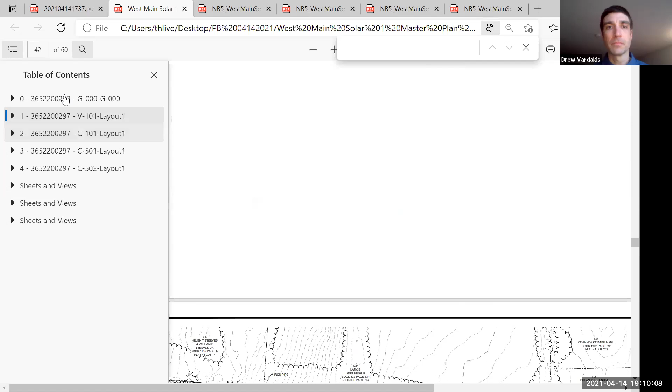Drew, can you introduce yourself? Yes, can everyone hear me? Yes. Yeah. Thank you, Helen.

Members of the board, thanks for having us back this evening. My name is Andrew Vardakis. I'm a civil engineer. I work for Wood Environment and Infrastructure Solutions. We're located at 275 Promenade Street in Providence and 271 Mill Road, Massachusetts. I'm registered in the state of Rhode Island, as well as our company Wood, registered in the state of Rhode Island. I'm the engineer of record on the project.

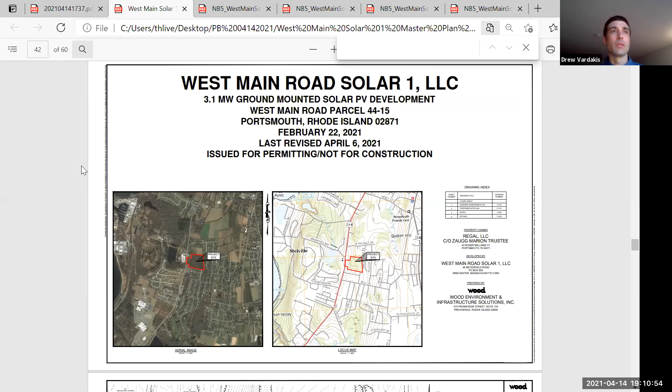So as Helen stated, we were here back in January to present the project. And I can see you have the site plan up, so I won't bother to share my screen. Essentially, the project involves the 18-acre lot and the project area of about 12 acres of that. Within that 12 acres, the fence line occupies about 8 acres. So on the first sheet, you can see the existing conditions plan.

Wood's role as part of this project is the consultant to the applicant. We're the engineers, we do the wetland surveying, we develop the permit applications and the site plan drawings. The first page is the existing conditions plan. It shows the lot, the topography, the property lines, the abutters, things of that nature. If we go to the second sheet, it shows the proposed site plan, which shows the solar array and everything associated with it.

So if you're looking on the west side, the left side of the screen is the west, that's West Main Road. You can see that dark gray hatch area coming in. That's the access road, a 20-foot wide access road. We placed that adjacent to the property line to situate it between two existing utility poles and a catch basin.

That's the construction entrance, which has some larger stone rock for construction vehicles to reduce the amount of sediment being tracked out onto the paved road. And as you can see, there's a bend in that road, so we can sweep the road away from the property line and get into the project area - one, to get away from the property line, but two, to minimize views as you look into the project site.

So if you follow that road in, there's a turnaround, a hammerhead turnaround there for construction vehicles and maintenance vehicles, which leads up to the fence line. It's a little hard to see, but that road essentially terminates at the fence line where there's a proposed 12-foot wide gate. That fence line essentially encompasses the array.

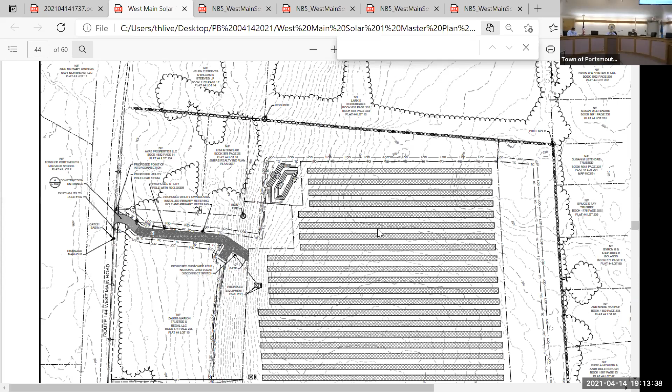So with that tree clearing line, and there's an LOD line, limit of disturbance, that's the ultimate limit of work and limit of disturbance area. We abide by property line setbacks, a minimum of 50 feet, which you can see in the upper right-hand corner is the closest we get to the property line. That 50-foot setback follows around the east side of the property as well as the south. But within that setback, we're not touching any of the vegetation - it remains. We can get into more vegetation and screening details as we move forward with Kevin, our landscape architect. Essentially, the property line setbacks are maintained at a minimum of 50 feet.

From a stormwater, grading and drainage perspective, since we last were here in January we developed some preliminary stormwater plans. Up in the northwest corner you can see grading contours and a stormwater basin. Also on the south side there are three separate basins - the darker lines are proposed grading contours along the south side. Those account for the tree clearing and the change in vegetation and ground cover. What we're looking at now is stormwater calculations to look at the change in runoff due to the tree clearing, which is converted to grass underneath the array.

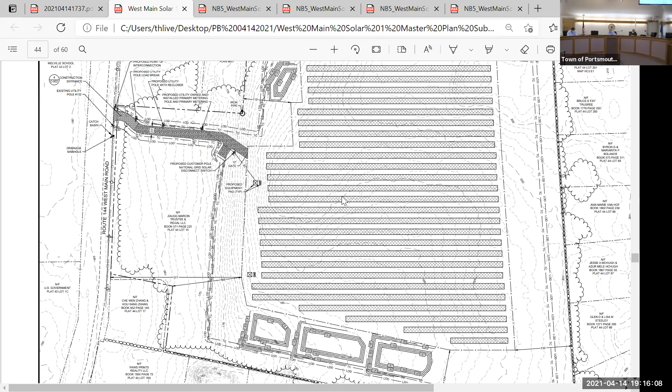As part of the electrical piece of this, the solar panels collect the energy. There are inverters within the array that convert that energy and send it out. There are 2 boxes that say proposed equipment pads - underground conduit collects the energy and goes to those 2 equipment pads on the west side, inside the fenced area. Then there's underground conduit that goes out to the proposed utility poles, the series of poles you see as black dots along the road, which head out to West Main Road, where the electricity is interconnected to the existing electrical grid.

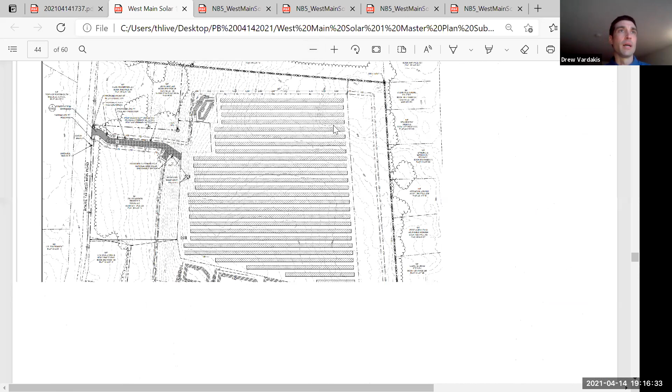So that's my high level overall summary. Detailed in your packets there's a narrative that goes through the details, the number of modules, more detailed information, and also in Appendix F, how we address parts of the narrative for signage and emergency contact information and things of that nature.

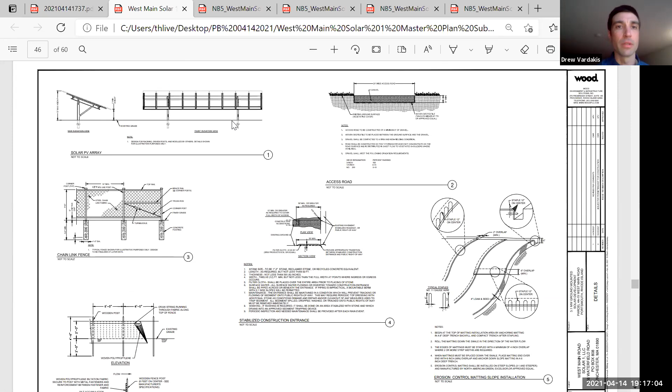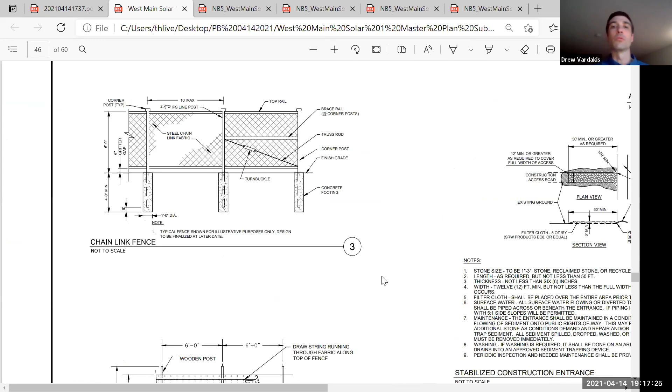The rest of the drawings cover erosion and sediment controls, the fencing - there were some comments last time about the fence height and leaving a 6-inch gap to allow for wildlife passage underneath the fence, so we've incorporated those comments into the fencing. You can see a cross section of the solar PV array, what the racking system looks like, the access road, the construction entrance, and silt fence for erosion and sedimentation control. Those are all the construction type details as you go through. In the sheet prior there were also additional notes regarding the DEM, grading and drainage notes, erosion control, seeding and vegetation, things of that nature.

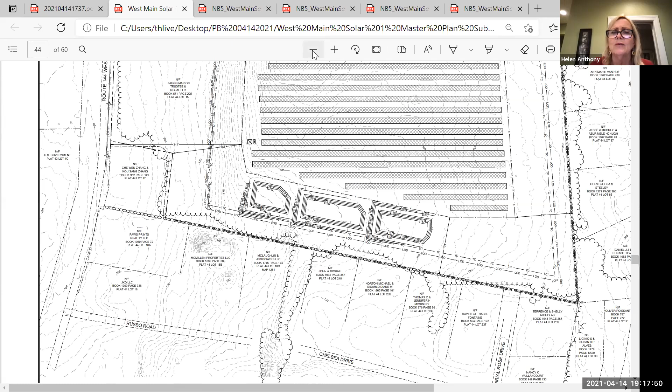So I'm happy to take any questions, or Helen, do you want to move on to Kevin next? No, we'll see if board members have questions. Anybody have any questions of this witness? Mr. Chairman, yes, I was just wondering if I could ask Drew to go over Schedule F. All right, that's you, so he has not finished talking. Go ahead. Thank you.

As Helen mentioned, in attachment F we go through compliance with the zoning requirements - you'll see that in the packet, I believe it's page 54 within that PDF document. We can walk through them one by one if you'd like, but we outline each item there. Number one, how we require and address the reviews and approvals pursuant to the town. Number two, this qualifies as a large solar energy system. Number three, I mentioned the height will be less than 10 feet with the solar panels. Number four was the yard setbacks, minimum 50 feet. Number five was cited and designed to minimize impacts to the neighbors and natural resources.

And we looked at that from a stormwater perspective and minimize clearing as much as possible. Kevin can get into the design to minimize impacts to neighbors for screening and buffering and those types of things. Number six is the interconnection.

There's an impact study in the packet provided by the applicant from National Grid. The study is part of the project.

Seven was land clearing. I mentioned the 12 acres of clearing, but no topsoil stripping, no grading, no major earth moving except for what's needed to put in those stormwater basins that I mentioned.

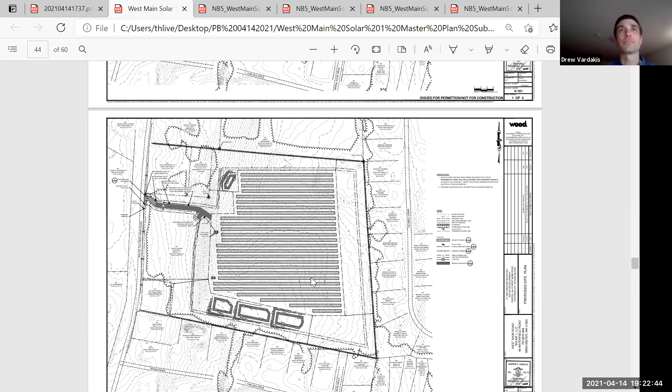Anybody else have any questions? If not, I do. You're talking about these storm drain calculations. What storm are you basing your calculations on? I believe we are looking at the 100-year storm.

My colleague, Gene Haggerty, is also on the line. Correct me if I'm wrong, I believe it's a 100-year storm. Yes, that's correct. We ran the 25 and the 100-year storms.

Who are you and what's your address? Gene Haggerty from Wood Environment and Infrastructure Solutions. I work at 271 Mill Road in Chelmsford, Massachusetts. Working with Drew on the plans.

We've looked at the 1 year, 2 year, 25 year and 100-year flood event. But your calculation is going to be based on a 100-year plan. Yes.

Thank you. All right, you may proceed, Counselor. Thank you, Mr. Chairman. Next, I'd like to introduce Kevin Alverson to discuss in detail the landscaping plan for the project. Kevin, could you please introduce yourself?

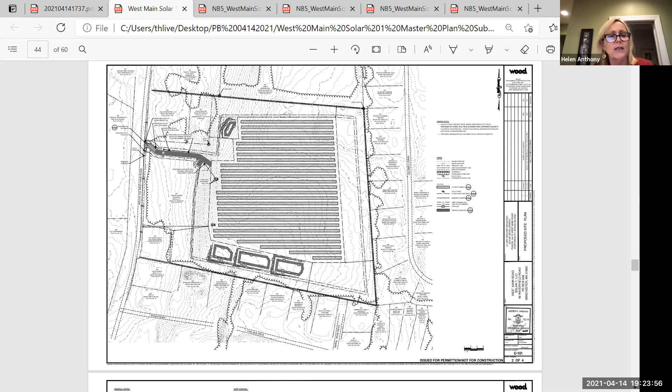Sure. Can everybody hear me okay? Yes. Okay, my name is Kevin Alverson. I'm a registered landscape architect and the president of Kevin M. Alverson Landscape Architecture in Wickford, Rhode Island. I'm registered in the state of Rhode Island for landscape architecture.

I was contacted on this project to review the site for its existing buffering, as well as ensuring proper visual screening and buffering from the abutting properties and public roadways. I visited the site back in late January to assess the site and any view corridors from West Main Road, as well as the abutting residences. I found that the site is largely vegetated with predominantly deciduous or non-evergreen vegetation, although there is a spattering of native evergreen species through there, as you'd imagine in an area like this.

I worked closely with the project engineers and developers on proposing a site layout that would minimize disturbance to the existing buffer that's out there, as well as providing supplemental buffering where necessary to ensure that any sight lines from those abutting residences would be obscured from components of the facility.

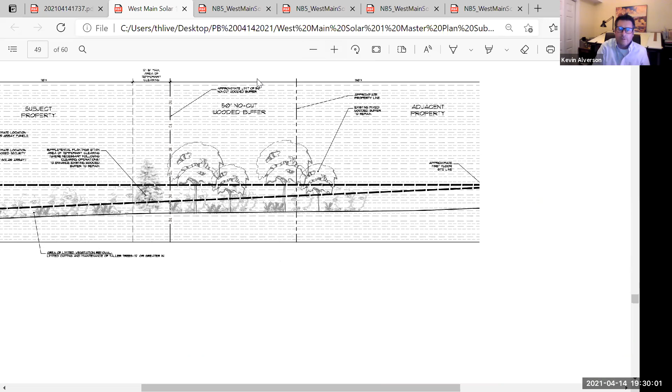So the lower cross section on this sheet is of that southern property line, a typical cross section. And what you can see on the right-hand side of your sheet is residences from a first floor standpoint, viewing into the site.

These lines along the bottom are the proposed grade as it's designed currently. You'll see that from those residences, there's certainly their cleared backyard area, and in certain areas, there's actually more vegetation between the house and the property line. But from a minimal buffering standpoint, we have that 50-foot no-cut buffer you can see in the center of your sheet.

And then on the left-hand side of that, the northern section of that no-cut buffer, we have a bermed portion where the southern edge of the stormwater basin is bermed up a number of feet. The proposal would be to plant on top of that berm a supplemental evergreen buffer. Those dashed lines with the arrows across are view lines from a human perspective standpoint on the first floor.

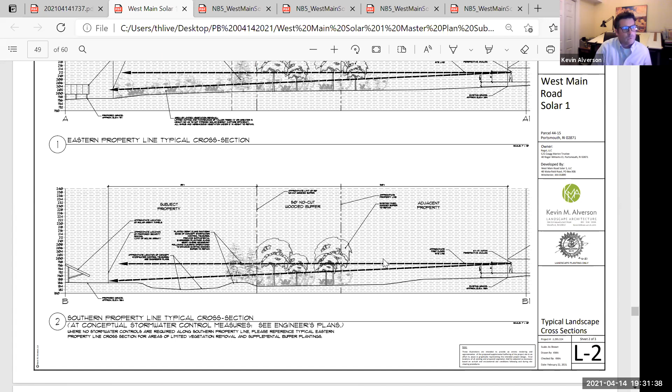Similarly, along the eastern property line, you'll see that cross section up above. That's where we are not anticipating any requirements for stormwater facilities due to the existing topography, which we're trying to maintain to the greatest extent practicable.

You'll see that from the abutting residences, that same view line, the 50-foot no-cut buffer, but then there's supplementally on top of that, I'm just calling out 70 since it sort of ranges, but it ranges from 60 to 85. That area is that limited clearing section.

So you can see we're maintaining the shrub vegetation, but on the eastern side of that, between the no-cut buffer and that limited clearing buffer, that's where we're proposing a temporary clearing path where we would just remove trees as necessary and shrubs to be able to add supplemental vegetation. You can see that evergreen tree placed in there.

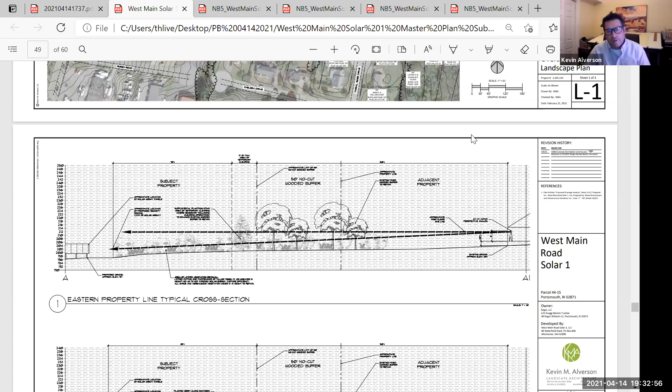The intent is to maintain all of the vegetation on the west side of that tree, with the row of supplemental plantings strategically placed to obscure the facility from the residences, plus the 50-foot no-cut buffer. So collectively, we're well over 135 to 150 feet of buffering before you get to the fence line of the facility.

Along the northern portion of the site, just to cover all bases, that area is abutting the open space area, or non-developed area, to the north of the site. We are maintaining a minimum of 50-foot no-cut along there, but at the tightest point, as Mr. Vardakis had mentioned earlier, that's your 50-foot area.

But as you go further west, it expands out to over 100 feet, or close to 100 feet, near the western side or northwest corner, abutting those undeveloped portions to the north. However, we are also proposing some supplemental buffering, a mixed buffer in that area of deciduous and evergreen vegetation. The intent would be to create more of a naturalized buffer in that area.

And also provide some species that are pollinator friendly, and native species that would be typical of what you would find in these areas. But as you can imagine, a lot of woodland non-developed portions start to become a little bit of a monoculture, or just a handful of vegetative species.

So from an ecological standpoint, we found that peppering in additional shrubbery and trees will provide for better habitat, and what essentially will become the solar array itself will essentially become a field habitat. It actually provides a different form of habitat in these areas that is good for avian species, birds of prey, who can have that fringe vegetation where they can nest, and also good for pollinator species of insects and the like.

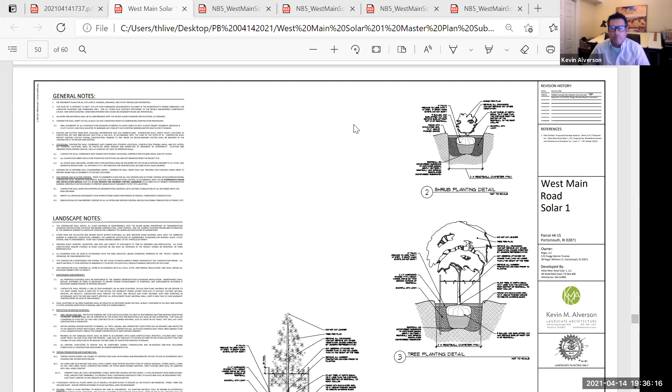If there are any questions of the board, I'm happy to answer any of those. Attorney Anthony, if you feel I've missed anything, please let me know. I don't think you've missed anything. All right, so do any members of the board have any questions?

Mr. Lopes: How should we incorporate the comments from the design review? That was exactly my question. I do want to commend the landscape architect - he's one of the few people that actually filled out the revision block correctly. It states that you incorporated the design review board comments, so I commend you for that, but I still think we should incorporate these for the record. I think it should be made an exhibit of the petition. That's up to the counsel.

Yes, thank you very much, Mr. Chairman. We would like an exhibit to this application, so label this exhibit 1. Exhibit 1.

My follow-on question, Mr. Chair, is - I'm sorry if I mispronounce your last name, Alverson, the landscape architect - so all the comments from Exhibit 1, the Design Review Board meeting of March 16th, have been incorporated into your landscape plan. Is that correct? That's correct. They had some comments as to species and placement of plants in particular, and we have addressed that in this revised submission. Thank you.

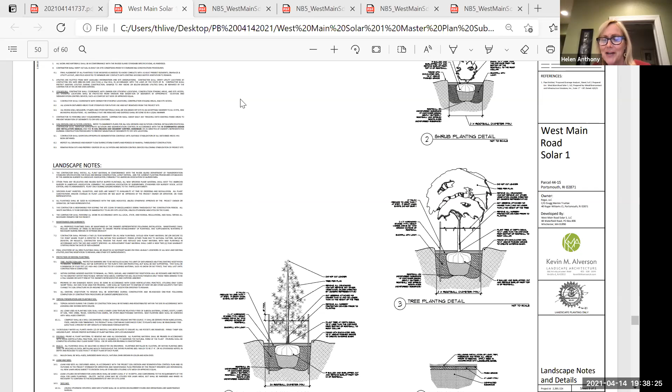Okay, thank you very much, Mr. Chair. I think that completes our presentation. We believe we satisfied the requirements for the master plan approval set forth in the solar energy system zoning ordinance, and we would ask for your approval of the master plan. All right, well, we got a ways to go before that, but okay, you can make your speech at the end. All right, we're now going to open this up to the public.

Does any member of the public wish to speak to this petition? We have a few - David Howard. David, if you could unmute yourself and state your name and address for the record. My name's David Howard, I'm at 36 Mariel Rose Drive in Portsmouth, and I have a couple of questions.

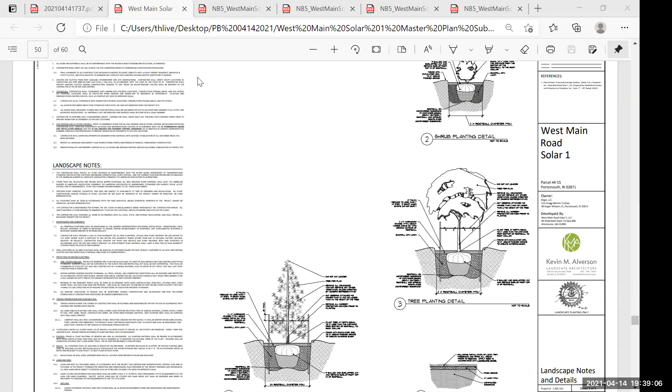The plan that I reviewed earlier did not contain information about the runoff and the basin in the northwest corner. The elevation there is about 185 feet, but at the southern end of the boundary, the elevation is about 10 feet lower. My question is, having seen what happened to property north of West Passage, where a developer created a berm that caused a backup of water on adjacent property which flowed into the backyards of residents on West Passage every heavy rain - is your analysis that even though that area is shown 10 feet higher, there's no risk of runoff going to those properties down on Chelsea Road?

Okay, let's have that answered. Counselor? I'd like Andrew to do that, please. Yeah, sure. Thank you, David, great question. Name, please. Andrew Vardakis, civil engineer from Wood.

Thanks for the question, great question, David. Yes, that's the full intent of our analysis that we're completing right now - that those basins will be sized appropriately, as mentioned before, for the 100-year storm. The intent is that they're sized properly so there's no overflow, no runoff, and the abutting properties won't be impacted from a flooding perspective. We're in the process of finalizing that design now, and also, as I mentioned, doing an on-site investigation to confirm the soil types to make sure we have those calculations designed properly.

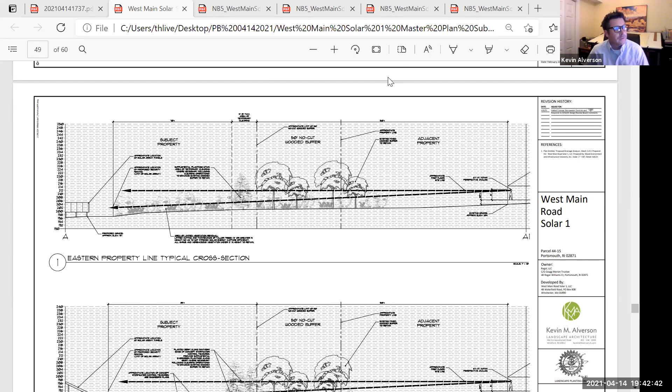If we could go to the cross section, the intent of the second, or the 50-foot no-cut buffer in particular, is that there are larger trees and vegetation existing in there. Coupled with what we're proposing for the supplemental buffer, we feel from a second floor standpoint, looking at the upper cross section because it's kind of the tougher scenario—since the lots along the eastern portion of the site are fairly level but a little elevated already—that sight line would actually be looking through the canopy of existing vegetation. So we feel it would be obscured from that standpoint. Certainly something we'll continue to analyze as we further develop the design.

If I can follow on. Yeah, go ahead, sir. Thank you. Those are mostly deciduous trees, so in the winter they're going to lose their leaves. Does that impact the view?

It certainly does. I mean, it's not as though we have a dense evergreen buffer through there, but that's the intent of the additional supplemental evergreen buffer that's going to be placed on the inside of that no-cut buffer.

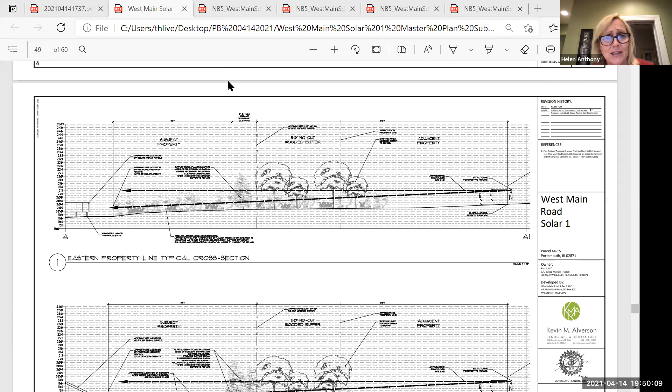I think we have presented a landscaping plan where we're trying to be very conservative and have added extra plantings on the north side. I will also say the property is zoned commercial and light industrial, so it very likely could be developed in a much more intensive way. Thank you.

Am I still on? You are. I couldn't hear hardly anything she said. Well, I had trouble with it too, so you're not telling me.

I just think that some of the supplemental plantings are really small plants like hollies, which are like 3 feet tall most of the time, or it takes them 50 years to grow. And I'm just wondering whether there could be maybe something that's a little bit more fast growing that could fill in spaces. And also the buffer on the north end does not seem that sufficient from my point of view.

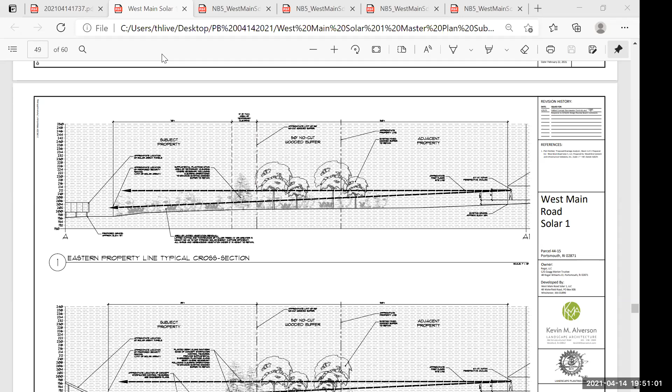Counselor? I don't think we have more to present than we have with our landscape architect. Well, what about the nature of the plantings? Are these small plants, or are they going to be large plants? All right, people that have to wait 20 years before it fills in? Can Kevin respond to that, Mr. Chairman?

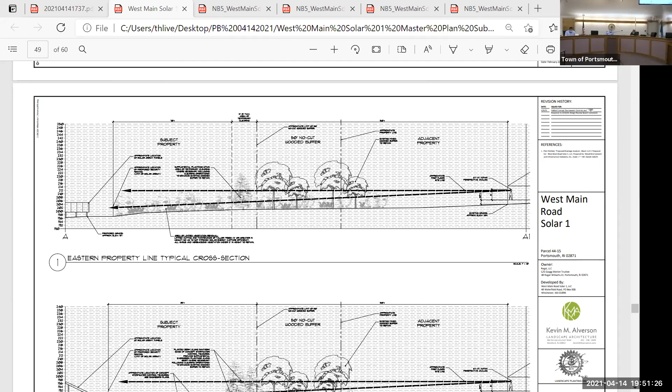Of course. Thank you. Hi, this is Kevin Alverson again. Thank you. If we could scroll to page 1, I believe, just to sort of clarify what the species are that we are proposing in those areas.

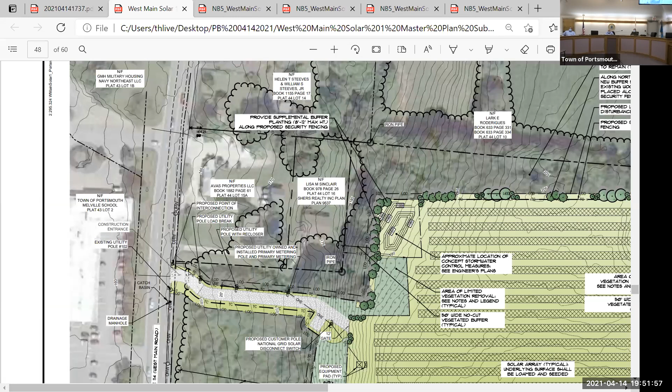There's a planting legend that's over on the side, and there are some shrub vegetation. If we could zoom in on that, that would be great. So on that sheet, there's a planting legend, and it does identify some shrub vegetation as well as some understory tree vegetation.

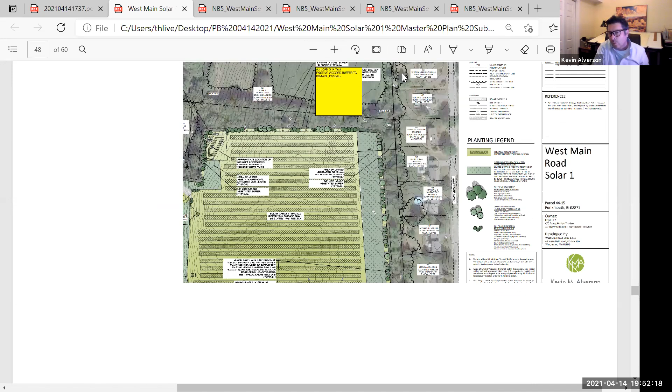But also the larger evergreen tree vegetation that we're proposing. Although conceptual in nature still at this point, the intent is to provide a mixture of a buffer. I've always found that having a layered buffer is much more effective than just essentially a line of trees. It looks more natural, it's more in keeping with the natural forest habitat. That mixture of vegetation allows for, even with the evergreen trees, which we are proposing along there, a mixture of pitch pine, white pine, eastern red cedar, white spruce, all trees that will get in the vicinity of 60 to 100 feet tall over time. We also want to mix in a variety of trees that are faster growing and slower growing, so that there's this mixture of habitat through there.

What we found is using some shrub vegetation, which may have been alluded to, there's some ilex, which is a holly, an evergreen holly called inkberry, that's also a good pollinator plant. Those help to infill the understory of those larger evergreen trees. So as the larger evergreen trees grow and mature, particularly with species like white pine, they tend to shade themselves out and the lower branches tend to go away. So we're trying to be cognizant of that and utilizing shrub vegetation in addition, so that it infills underneath the canopy or the upper parts of the vegetation.

So although every tree is not completely spec'd out on this at the master plan level, that will be developed further as we develop the design. But the categories of plants that are listed in that planting legend are meant to be utilized in that manner. I hope that helps to clarify.

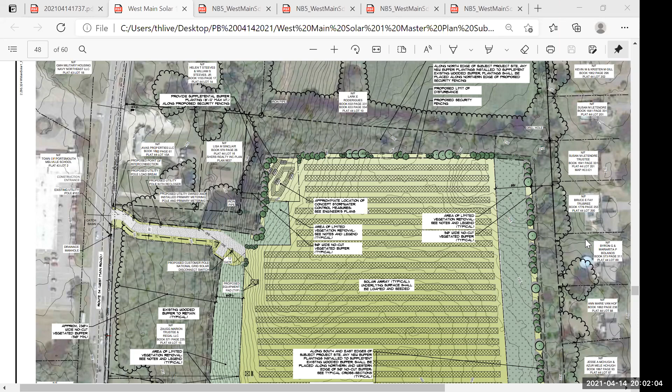Okay, so you could trim some trees, but others you wouldn't. Like on the east side, you don't expect to trim any branches closer to the array? That's correct. On the east and west sides, as you can see, we have the 50-foot no-cut buffer.

Say the trunk of the tree sits one foot outside our project area, the limited disturbance area - that tree may overhang into the project area, but in a way that's not near the array itself. It would overhang that limited clearing area, which would have trees and shrubs up to 12 feet in height, basically a lower-story forested habitat. So we don't see that being a concern along those areas, unless it's some freak thing.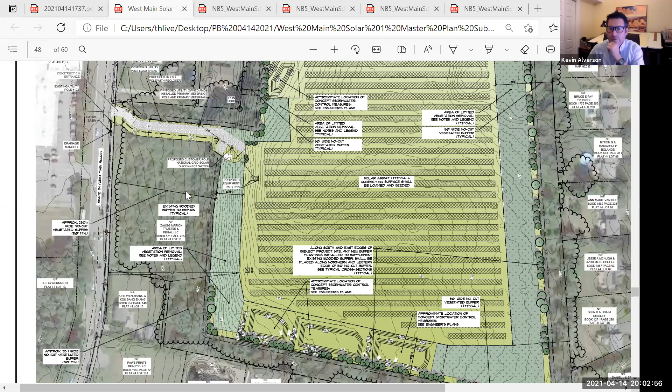We don't anticipate any tree along there having a radius, for lack of a better term, that exceeds that width. It's just along that northern area where the no-cut buffer is closer to the arrays that there may be some branches overhanging, and those we would need to cut properly.

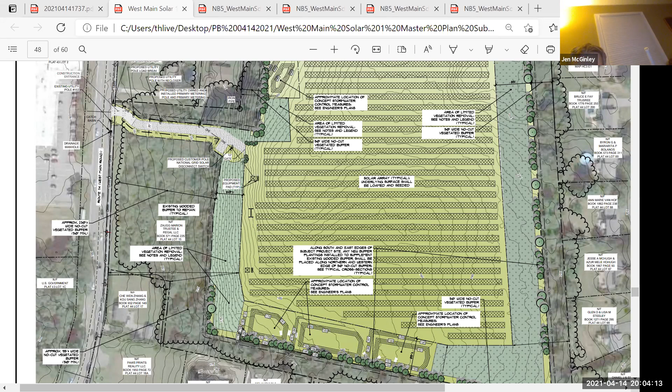Hi, can you hear me okay? Yep. This is Tom McGinley, I live at 19 Chelsea Drive, so I'm an abutter directly to the south. Go ahead, Mr. McGinley, I have a few questions. The first one has to do with the no-cut area.

I thought I saw somewhere in the plan that there's the possibility you might have to go in and cut out dead wood and things. Exactly how much of that no-cut buffer is really going to remain undisturbed? That's my first question. All right, Counselor, may I please have Mr. Alverson answer that?

Yeah, this is Kevin Alverson. The intent is to keep everything possible within that 50-foot buffer. As I mentioned in the last question, if there are trees that may be a fall hazard in those areas, or smaller vegetation that may be dead, we would just remove it. It's more a way for us to practically be able to selectively remove something that may be a danger to our site or your property, and also to people working within the facility - things dropping on the fence, that nature.

So that's really the intent of that wording in the specifications on the plans. But practically speaking, we are planning to keep everything we absolutely can within those areas. There's not going to be any clearing of vegetation just for that sake.

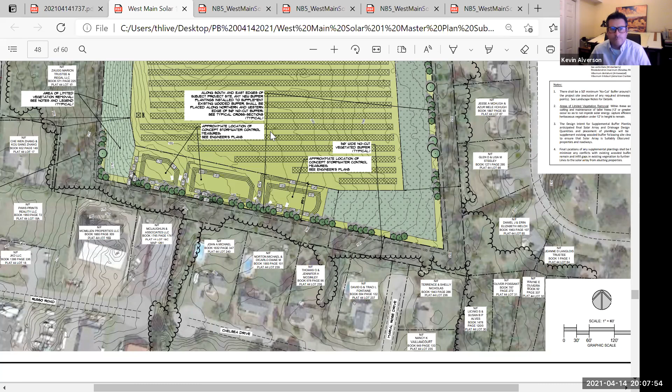Okay, thank you. I guess another question I wanted to ask, when you look at the elevation plan from the southern side, which I think is the bottom one, the cross sections? Cross section, yeah.

So one thing is, I guess because we have these stormwater basins, there won't be that buffer area of lower level vegetation. Is that correct? That's where the basins are.

That's correct. We would have our 50-foot no cut buffer, and then we would have that supplemental planted area for the 15 to 20 to 30 feet inside of that no cut buffer. That would be bermed and planted with fully evergreen vegetation trees, that's the intent there.

Do you know how high the berm will be? It varies, but this is sort of a typical, and I believe these are 1 foot, so it's about 4 feet or so. I think it varies, and certainly as we develop it, we'll have a better, more defined answer on that. But this particular cross section I took through is probably about 4 feet tall.

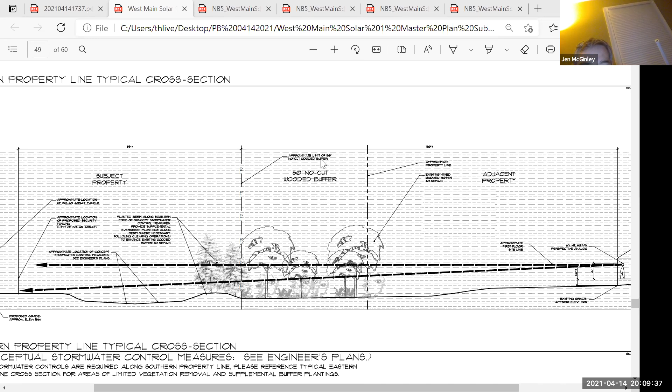Okay, as the abutter there, of course, I think the higher the better, as far as I'm concerned. Sure. But another thing I noticed, if I'm reading the elevation on the map correctly, this lot slopes up as you go to the north and the east.

So when you're looking at our sight line, particularly from the second story, we have to also take into account that increase in elevation. I think there's about a 25 foot increase in elevation, like from my backyard up to the northeast corner of the arrays. I don't know if that's been plotted correctly, it's more than that.

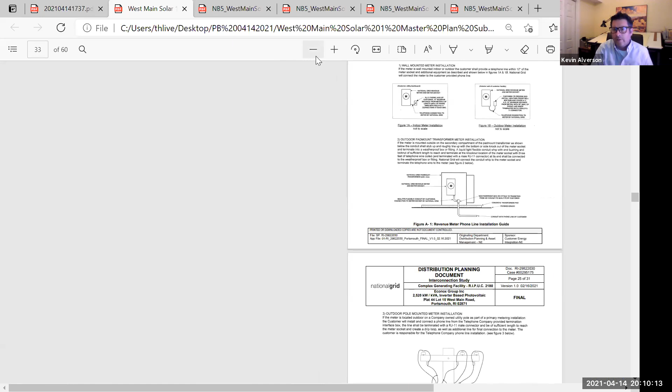Yeah, that is correct. It does go uphill as you go from there. So the supplemental trees that we're proposing in that area, although we haven't really established full on what the installation heights and things are, we're working through that detail right now, but the mature heights of those trees will be in that 60 to 70 foot range, also using faster growing trees in that area.

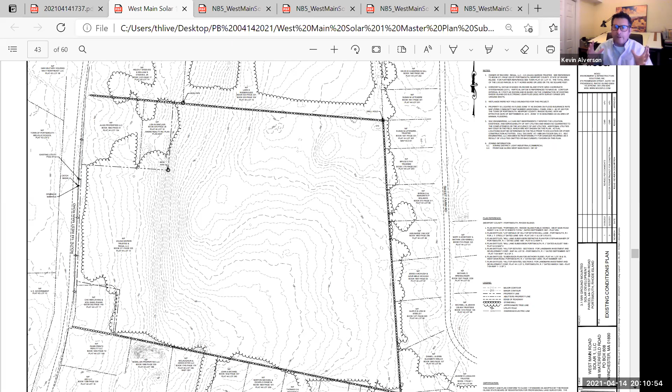Some of those faster growing trees are something like a white pine, which grow a lot faster. They're very thick when they first grow in, but as they mature, they start to lose some of their lower branches, which is the intent of having this layered buffer, where we have vegetation that'll get up to about 10-foot height as the understory, and then taller vegetation that grows. White pines, after their second or third year growth, can probably grow anywhere from 24 to 30 inches a year in a good year, and they'll reach a height of 60 to 80 feet.

When it comes to those stormwater basins, do we anticipate that those are filled with water all of the time? And what impact does that have for those of us that have wells right along the property line to the south? Do we know what that might be?

Mr. Chairman, may I have Mr. Vardakis answer that question? Absolutely. Yep, thank you, Andrew Vardakis, civil engineer from Wood.

That's what we're currently evaluating, as I mentioned before, with the final stormwater calculations and soil inspections. So we want to evaluate the on-site soils in those exact locations. Right now, we have some old existing data we've looked at, and online mapping, but we want to get out there and confirm the soils are in fact true to what we have for historic data and mapping.

But to answer your question, it depends on the type of system. There's a couple systems that are designed to infiltrate - infiltration basins. That's usually with a sandier type A or B soil, which infiltrates the water. And there's other design systems - detention basins - that are designed to hold water, then have an outlet with some sort of riprap or piping or flow control that controls the flow over the top of a berm. So we haven't finalized the design yet, but we don't anticipate impacts to wells or to abutters, whether in groundwater or surface water - that's all being finalized right now.

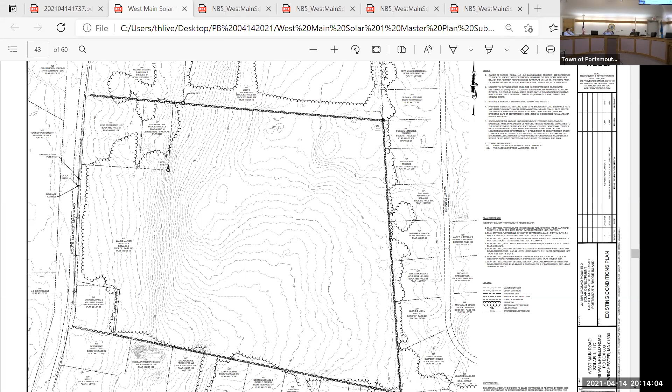Next person. Well, I just had one more quick question, if I may. Go ahead, Mr. McGinley. If I remember right from the preliminary plan that we saw in January, the buffers, including the no cut, extended about 150 feet, and it looks like now they're like 130. Can you confirm if that's the case, and if so, why?

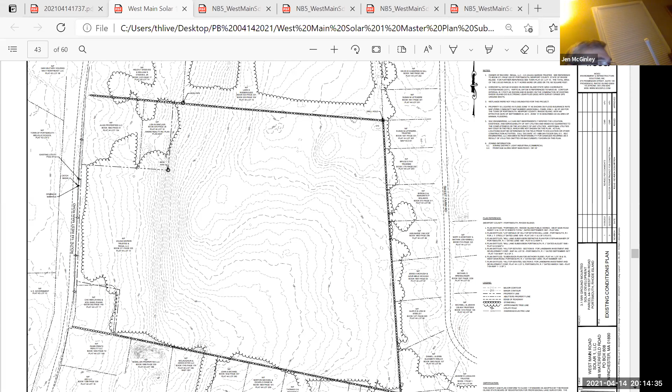Counselor? Yes, may I please have Mr. - handle that question? Or Mr. Vardakis? We'll take Mr. Vardakis first. Andrew Vardakis, civil engineer from Wood.

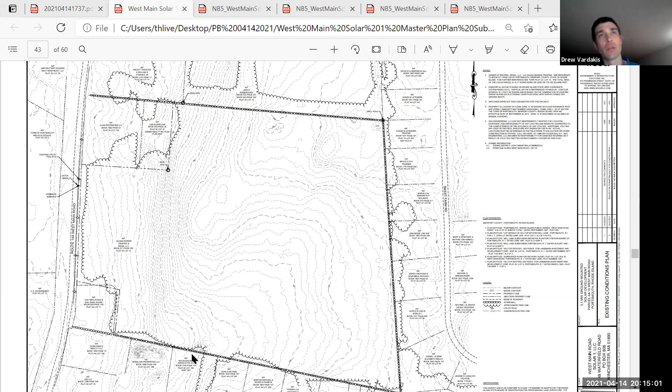Yes, I don't have that plan in front of me right now. Those, again, that was the pre-application stage where those drawings were very preliminary. So it's very possible those may have shifted 10 feet here or there, but the intent was to have that greater distance from the property line to the fence line in that 130 to 150 foot range. But I can't speak to certainty - I apologize, I don't have that plan in front of me at the moment.

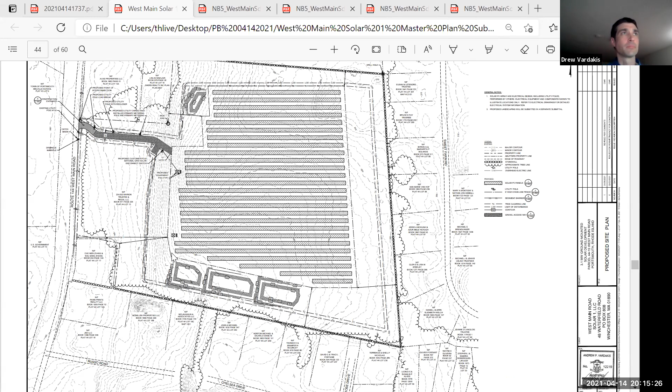Okay, thank you. All right, next person.

Lark, if you could give your name and address, please. Lark Roderick, 73 - I can't hear you. Lark Roderick, 73 Ridge Drive. Can you hear me? Did you get that, Dee Dee? I did not, but I do have Roderick's from other minutes. That is. I know who she is. Okay, hopefully we can hear you. Let me know if you can hear me once I start to talk, please.

So from the get-go, this proposed solar development has impacted not only me, but the entire neighborhood.

Yeah, it's completely muffled. I can't really understand what you're saying. All right, I'm going to sign out and sign back in. Maybe I could be put... Okay, we'll be here for a while. Thanks a lot. Not a problem. When Michael sees you pop on again, he'll put you to the beginning of the queue. Yeah, just raise your hand again when you come back on. Thank you. No problem. All right, next.

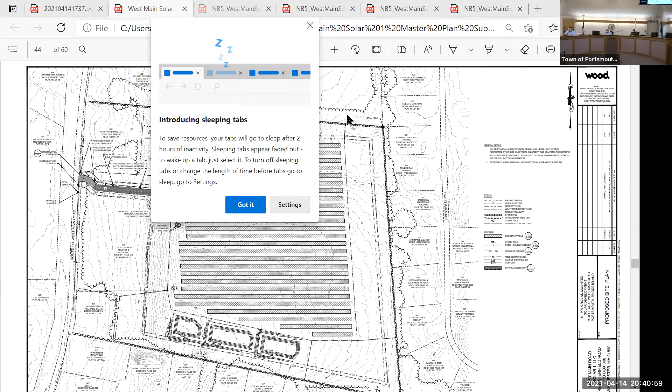So I'd like to know, how do you determine setbacks on each side of the design? I'm sorry, how were the setbacks determined on each side?

Counselor, yes Ms. Nichols. There are certain setback requirements set forth in the solar ordinance, and I can let Mr. Vardakis expound on that. Thanks, Counselor. Andrew Vardakis, civil engineer from Wood. Yes, if I understand the question correctly about setbacks, as Ms. Anthony stated, the setbacks are determined in the zoning ordinance, so we follow those as required by the town.

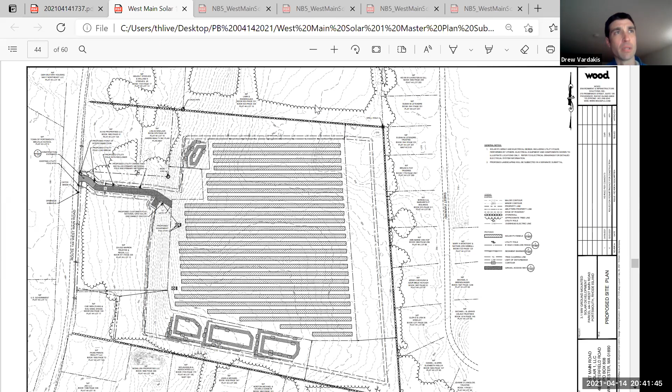But I'm wondering if there's a separate question about setbacks for the solar design. I don't want to speak for the applicant, but essentially the applicant looks at tree heights and tree shading in terms of clearing limits. So that's why you can see more tree clearing to the east, south, and west - that's where the shading is coming from the trees. And there's less tree clearing to the north because there's less tree shading on the northern side.

So I'm not sure if I'm understanding the question correctly, but those are my two answers on setbacks. Thank you. Kind of as you're alluding to, I think it would be equitable to offer similar setbacks for all neighbors who are abutting, considering that north, east, and south it's all residential. So basically what I would be asking for is consistent setbacks for all residential abutters.

Additionally, Kevin mentioned that you would have a process in place to adjust sightlines for buffering once the development was occurring. What would that process actually entail?

May I please have Mr. Alverson answer that? Sure. This is Kevin Alverson, thank you for the question. I guess the short answer is the full-on process is still in the development stage as far as how the different factors that might trigger or might be required as part of any approvals.

But from a typical standpoint, what we would do is throughout the construction, I usually am involved with reviewing the staked out, laid out limit of disturbance around the facility as tree clearing is occurring. If there are certain larger trees that we may want to make sure we're saving, we may adjust the limit of disturbance slightly here or there out of good practice to maximize our buffering and also minimize any clearing required outside of it.

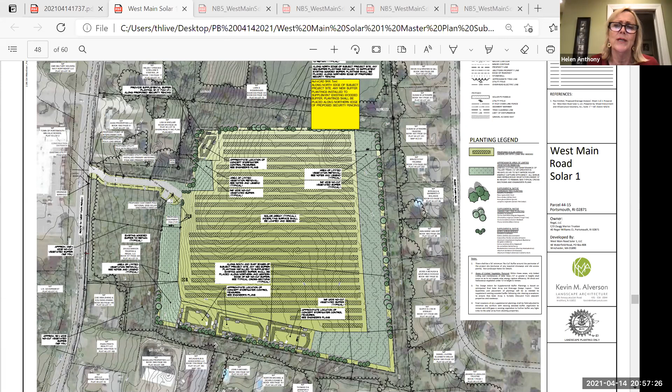Yes, there's a little question and answer section, and I guess Lark is on Robin Yowkin's line. If you understand what I'm saying. Yes, Michael does. I don't, but Michael does. Okay, so Robin's phone or Robin's account, is this Lark? Hi, can you hear me now? Yes. Okay, I had to run down the hill so that I could actually be able to do this. So here I am. Okay.

I have just a bit of a comment and then a couple questions if you don't mind. Sure. So from the get-go, this proposed solar farm development has impacted not only me, but the entire neighborhood.

We had to keep constant watch as the plan bounced from meeting to meeting. Some were not advertised. Some meetings were taken over by Lujaldi, the owner of the property where the proposed site has rights to development as he sees fit. I have several concerns about Portsmouth allowing such a large solar development in a residential neighborhood, literally in people's backyards. Issues such as months, if not years, of unsettled destruction from clear-cutting woodland and displacing wildlife, to drilling, blasting, disrupting, contaminating soil, runoff down the hill towards wetland and children's playgrounds at Melville.

Have any tests been done on all these issues? Have solar glare tests been done? And if a fire breaks out in Portsmouth, do we have a plan to deal with something this large so close to people's homes? And what will they use to keep the foliage down around the panels? There are so many unknowns, and even today we've heard that there are unknowns from them also. What we know for sure is that our property will be affected, property values.

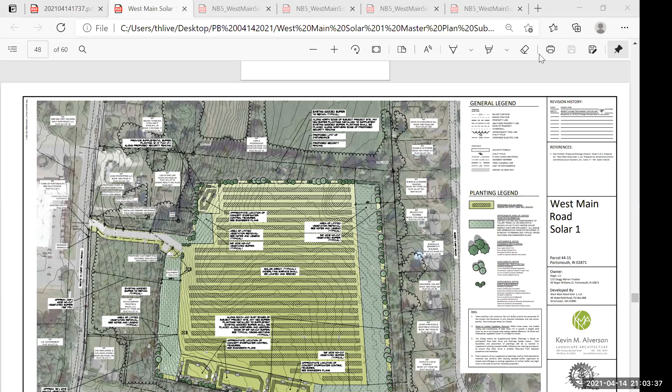Michael? No one else on there right now. Nobody else? All right.

Does anybody have any questions of the applicant from the board? All right, what's the pleasure of the board? This is Ryan. I can make a motion.

Go ahead, Mr. Tibbetts. I'll make a motion to approve the master plan application with some provisions that we should document. I'll go through. First one, definitely incorporating the design review board recommendations, and I think we said entering that into the record as exhibit 1.

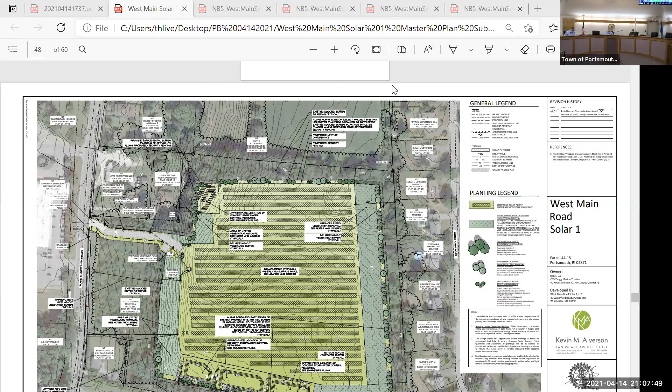All right, we're finished with item number 3. Item number 4, applicant West Main Solar 2, Regal LLC, location AP 30 Lot 8, West Main Road, just south of Lehigh Terrace. Request for advisory opinion.

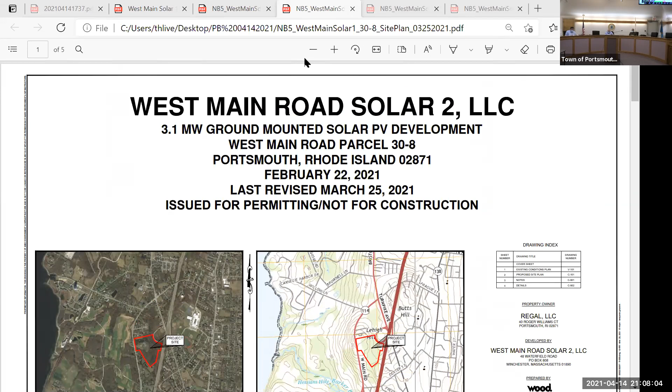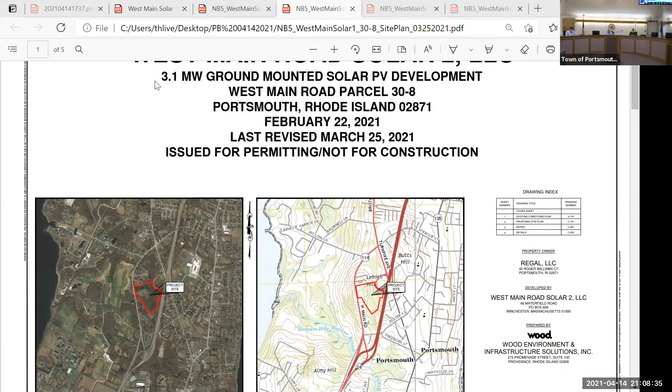That's still you, Counselor? I'm still here, Mr. Chair. Would you like me to go through my name and address and everything for the record? Not if I can't hear you. Oh, no, okay, all right. Can you hear me now? I can hear you now. Okay, all right.

So again, my name is Helen Anthony, I'm the attorney from Handy Law LLC. I'm here on behalf of West Main Solar 2 with regard to the development plan review for a 3.1 megawatt ground mounted solar project, property located on West Main Road, about 0.01 miles south of Lehigh Terrace, Assessor's Plat 30, Lot 8, property is owned by Regal LLC. This 24-acre site is zoned E20.

The total development area is 7.5 acres, which is 31% of the site. Pursuant to the Solar Energy Systems Ordinance number 2020-12-14, the proposed solar energy system is allowed to be developed on Plat 30, Lot 8, with the approval of a special permit. The Planning Board and the Design Review Board act in an advisory capacity to the Zoning Board of Review. So tonight, the applicant is asking the Planning Board to submit a recommendation of approval of a special permit to the Zoning Board.

So I'm here again with the team, Scott Milnes and Steve Kerr of West Main Road Solar 2 LLC, the developer, Andrew Vardakis and Dean Haggerty of Wood Environment and Infrastructure Solutions, Inc., who are the engineers, and Kevin Alverson from Landscape Architect, to present this project and answer your questions and those of the public.

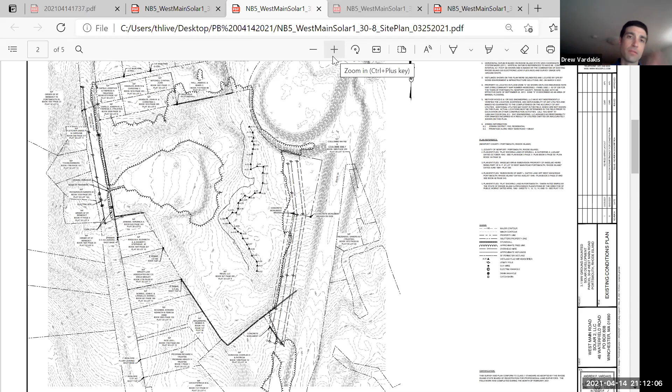The previous plans had some old mapping lines, some old delineation lines that were more straight up and down. But when we went out, we found the wetland line to go a little bit further to the west, which is shown here, with that 50-foot wetland perimeter buffer set to the left of that line. So that's the biggest difference here on the existing conditions plan.

On the next sheet for the proposed site plan, we've redesigned the solar project to avoid those wetland areas. So you can see again, it's kind of faded back in gray, but that wetland line runs through the center. There's a 50-foot buffer to the left of that. And that's where our limit of work, limit of disturbance, tree clearing lines, all that's where those darker lines are kind of all laid on top of each other. That's where the limit of work starts there.

Similar to the last project, we have an access road coming in from West Main on the left, on the west side of the road, a 20-foot wide access road. We wanted to jog the road in to avoid poles, but also to avoid visual impacts on the project. This road ends at the fence with a 12-foot gate, and the project is surrounded by a 6-foot high chain link fence.

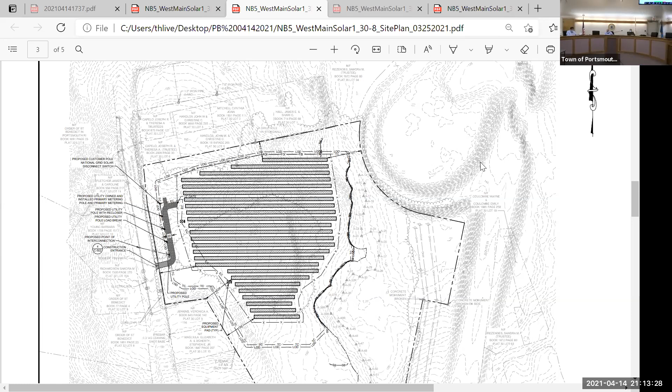As discussed at design review board, it's a 6-foot high chain link fence with a 6-inch gap at the bottom. Most of the design aspects are fairly similar to the first project. We have the 50-foot setback and the no-cut buffer along the north side, maintained around the west side as well.

The tree cutting areas extend out to the east and west and also to the south. Again, same type of electrical components with the inverters, conduits, pads, and poles. So most of the design aspects present to be the same here.

We're finalizing the stormwater design here with the 100-year storm event for those stormwater calculations, and we will be submitting a wetlands permit application to DEM due to the proximity to the new wetland line that we delineated.

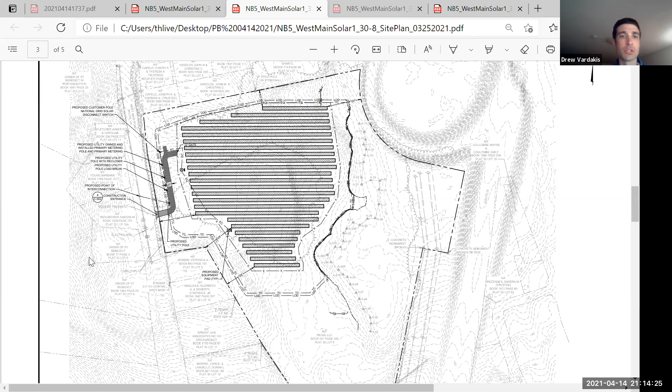As we go through, these are similar typical detail sheets with the typical cross section of the array, the access road, the construction entrance, the fence, and things of that nature for erosion and sedimentation controls. As noted on the past project, there's notes in there for fertilizer and lime, and herbicides and pesticides. Those will be clarified as we proceed, and all those are clear and in conjunction with the landscape plans.

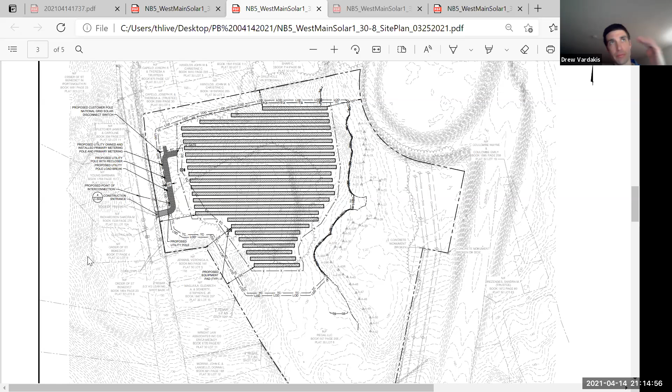Similar to the last project, in your packet attachment F walks through the planning requirements. I believe that's on page 50 of the PDF. Again, it walks through all those items pretty much similar to the previous project.

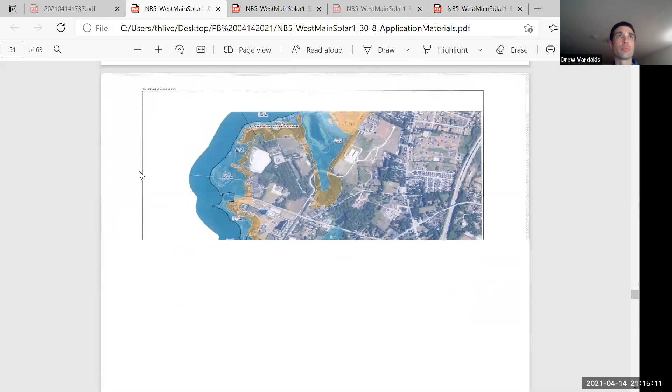Item 1 was that the system is in accordance with local codes. Number 2, it qualifies as a large solar system. Number 3, the same design for the panel height — it'll be less than 10 feet, sloping down to about 2 or 3 feet in the front.

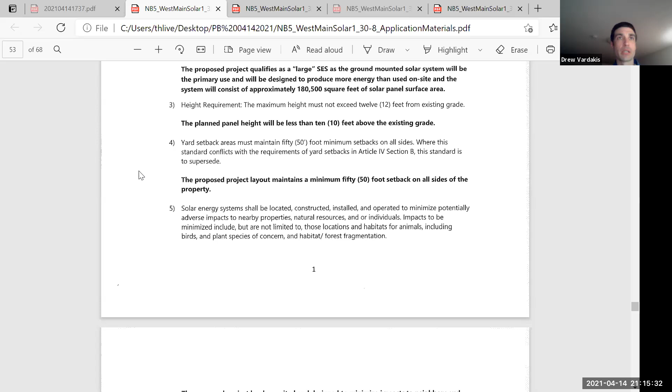The yard setbacks are met — that same 50-foot setback. Mr. Alverson will get into the screening again on this site. Number 5 goes into what's decided for impacts to neighbors and natural resources.

Number 6, the interconnection with National Grid was provided. Number 7, the land clearing was minimized just for the installation of the project — no major grading, no topsoil stripping, just what's needed to install the project. Number 8, security fencing, the 6-foot high chain link fence with the 6-inch gap at the bottom.

Number 9, buffer and screening, I'll leave to Mr. Alverson with the landscape plan. Number 10, also the pollinator-friendly seed mixes. Number 11, no lighting proposed, kept to a minimum for safety. Same for signage, number 12, to meet the town requirements with emergency contact information.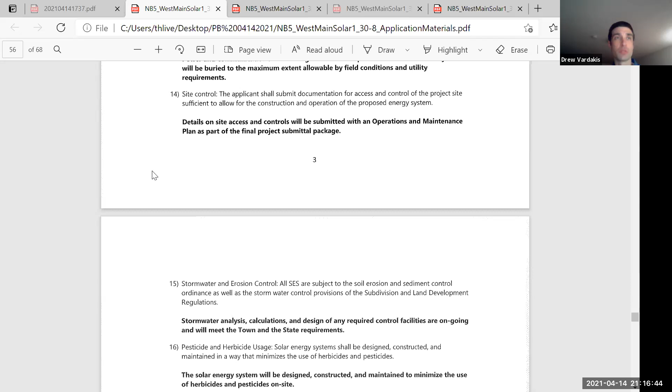Number 13 was the power lines underground from the system out to the poles, and then overhead out to the existing pole for the interconnection on West Main Road. Site control will be provided with the O&M plan as we proceed. Number 15 was the stormwater analysis I mentioned, as with the previous project, currently being finalized.

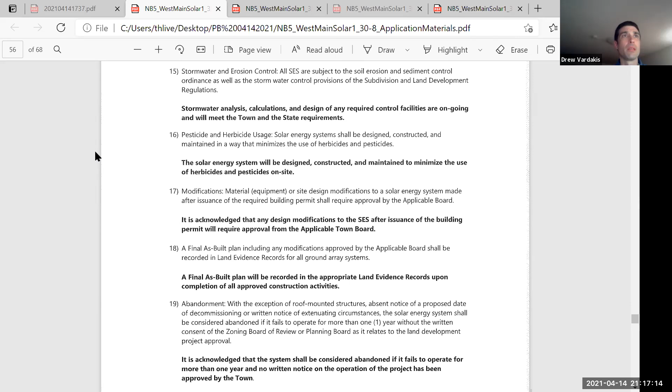This was the one, again, will be clarified. Number 16 says the solar energy system will be designed, constructed, and maintained to minimize the use of herbicides and pesticides — that will be clarified to be eliminated, so herbicides and pesticides will not be used. Number 17, material modifications will be brought to the board. Number 18, as-built plans will be provided. And again, as we go on, the applicant will submit supplemental information on abandonment, decommissioning, and financial surety.

So that's all I have. I'm happy to hand it back to Ms. Anthony or take any questions.

Are there any questions, Mr. Chair? Not so far. Okay, sorry.

All right, I'd also like to introduce again. I do have a question. Oh, pardon me? What are you here for on this one? Well, tonight, a request for an advisory opinion. Yes, an advisory opinion, that's correct. So this is not here for master plan review. No, we are not here for master plan review. All right, just want to make sure. Yes.

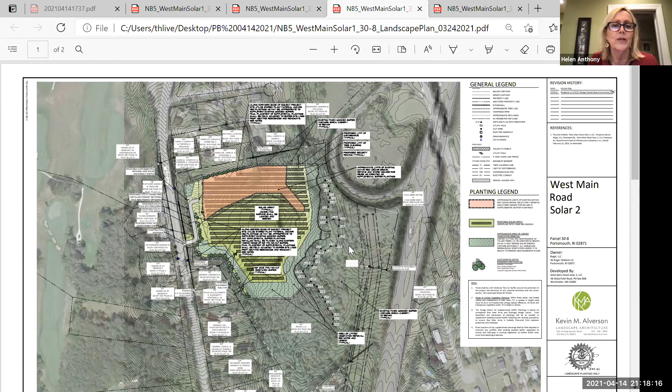Okay, then I would like to ask Mr. Alverson to go over the landscaping plans. Sure. Kevin Alverson, landscape architect and president of Kevin M. Alverson Landscape Architecture.

To give an overall view of this project site, it's a little different in that a large portion of the area intended to have the solar arrays is actually previously cleared. I had walked this site back in late January and early February, and reviewed the existing buffering to the abutters around the perimeter of the site, and also viewed it from West Main Road. There's currently an existing driveway access that enters the site off of West Main Road.

The intent is to utilize that existing entrance, but as Mr. Vardakis had mentioned, we worked closely with the team to develop a roadway entranceway that would minimize views from West Main Road into the site. So along the western side of the sheet, we're turning the road and moving it north, making the access further up, which provides an opportunity to densely plant evergreen vegetation at that point to block the view angles.

Along the northern portion of the site, the area shaded in an orangey color has substantial existing vegetation, typical of what you'd see in stripped soils like this. We call them pioneer species - there's a lot of eastern red cedar, some birch, some black cherry, and much of it, particularly the cedars, is fairly mature and large in size. Working with the design team, the intent is to utilize a good number of those to help supplement our buffering around the perimeter of the site.

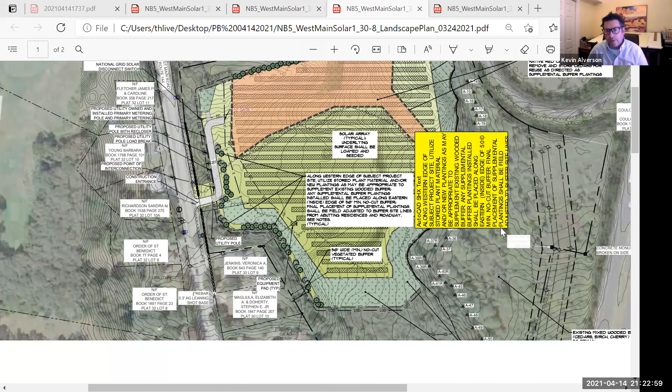We worked with the team to maximize the area where we're putting the solar array while being cognizant of the topography in those areas, in order to minimize the amount of clearing necessary.

As Mr. Vardakis mentioned earlier, we have the wetland complex along the eastern portion of the site. We'll be respecting all DEM boundaries and perimeter wetlands. There's a 50-foot setback required by law from that wetland system, and our limited clearing area, which would only remove large trees, would be in addition to that - so 50 to 75 feet in addition - and that's where the fence line would be.

The second sheet to this, again, is conceptual in nature, but this is the design intent and methodology that we're looking to utilize out here. But again, like with all of these projects, we want to maintain the ability to look at the site as it's being developed and adjust plantings as necessary.

To make sure that the intent of the plan is being met, which is obscuring the proposed facility from the abutters and from the abutting public roadways. The secondary sheet mainly has details of the proper plantings and also notes and specifications about the planting, which outline the 2-year minimum maintenance, warranty or guarantee on the plants.

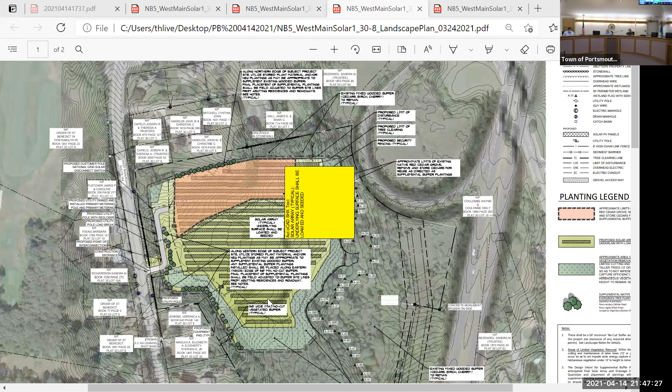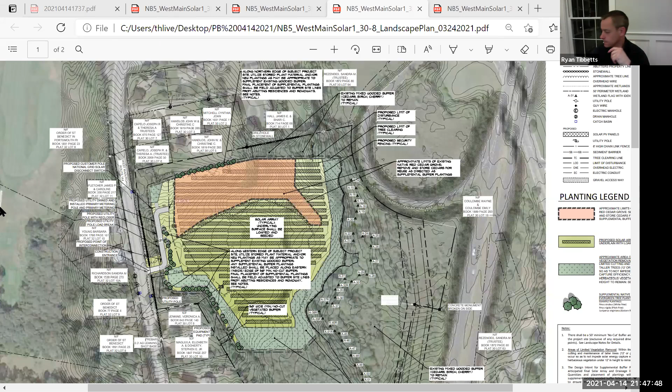All right, is there a motion to place it on record? Yes, accept and place on record. Second to place on the record. All right, all in favor, say aye - we'll go the long way, we gotta do it the long way. Mr. Harding, aye. Mr. Lopes, aye. Ms. Wilson, thumbs up, got it. Mr. Garceau, aye. Tibbetts, aye. Palat, aye. Chair votes in favor.

Motion to adjourn? Yes, motion to adjourn. So moved. Who's gonna do the honors? Aye. Lopes got the motion, second. We're out of here.